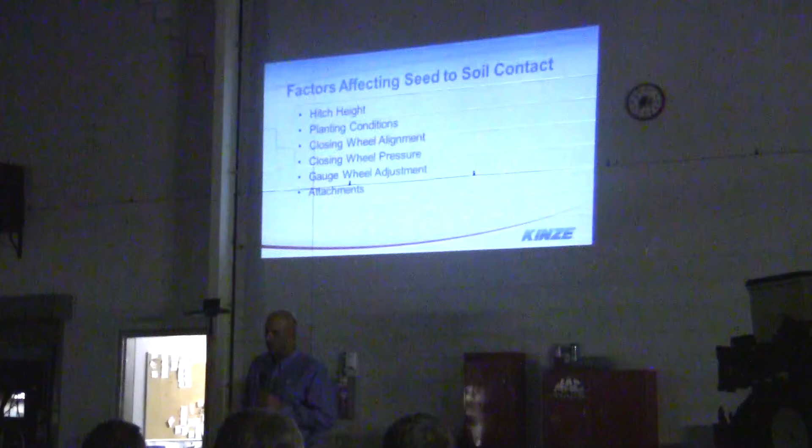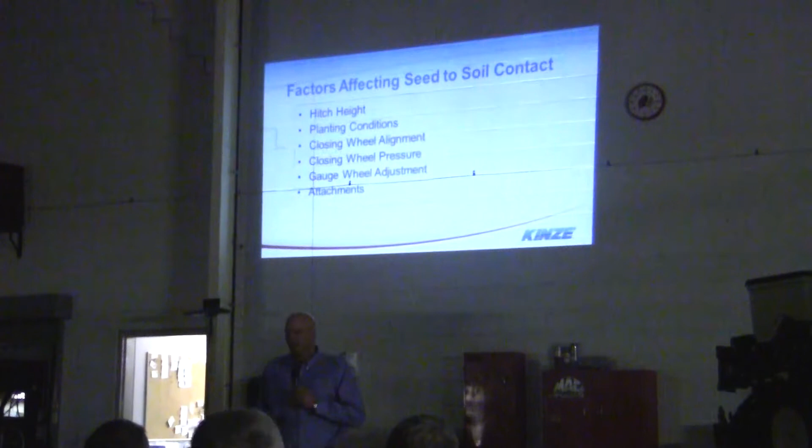Factors affecting seed to soil contact include hitch height, planting conditions, whether it's too dry or too wet, closing wheel pressure, closing wheel alignment, and gauge wheel adjustments and attachments.

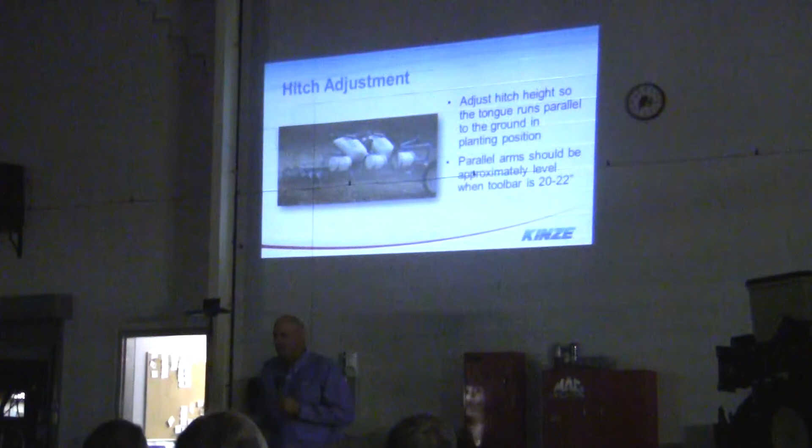We talked a lot about hitch adjustment, and the hitch height should be parallel with the tongue and the ground when planting in the planting position. Parallel arms should be about 22 inches from the ground to the hitch.

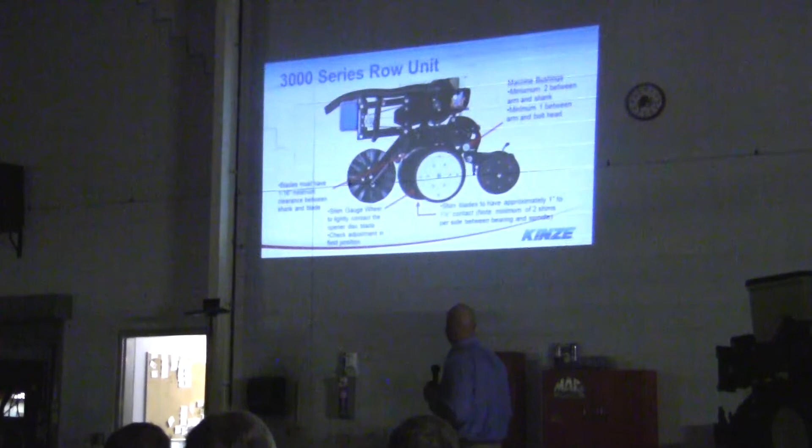This is a 3000 series tool or row unit, and you can see some of the things. Blades must have a 1/16 inch minimum clearance between the shank and the blade. The shim gauge wheel should lightly contact the opener, and that should be adjusted in the field position. Shim blade should have 1 to 1.5 inches of contact, and the machine bushings, a minimum of 2 between the arm and shank, and a minimum of 1 between the arm and bolt head.

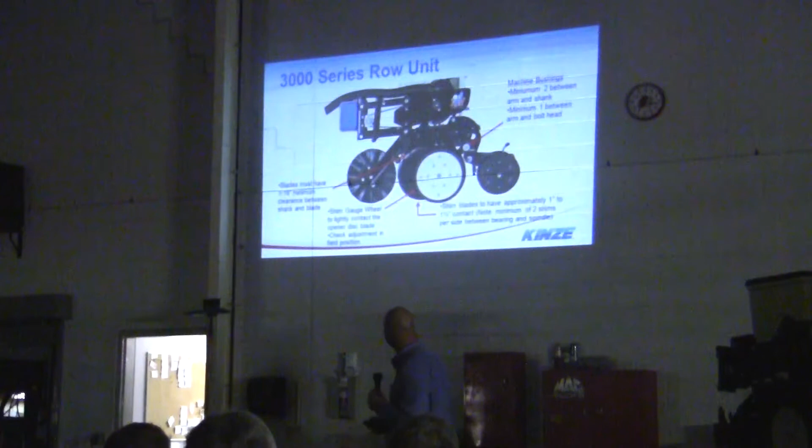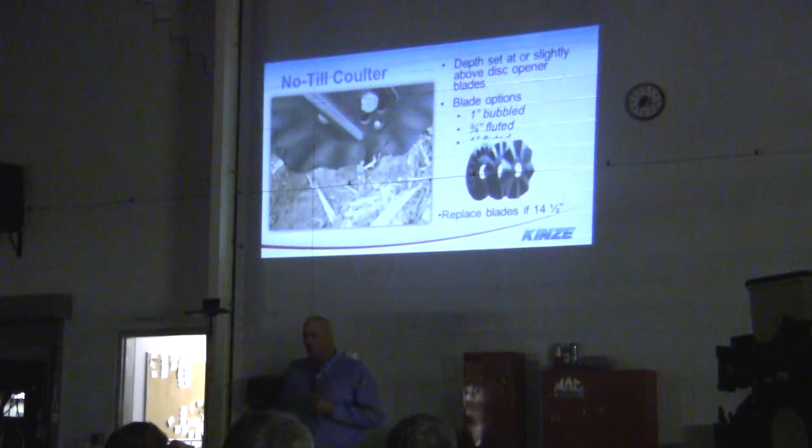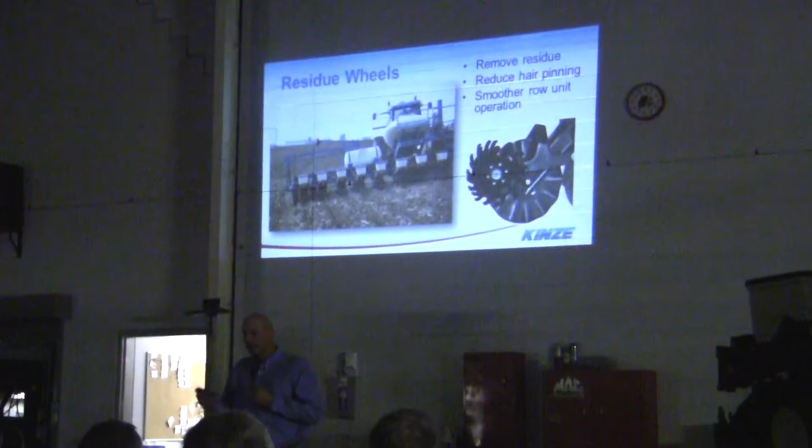Residue wheels, this is another thing that's different wherever you go. We feel very confident with our residue wheels. They're floating wheels. A lot of guys will put gauge wheels on them, but we feel it's not necessary because they're floating wheels. They float with the depth and the setting out in the field. The purpose of this is to remove residue, reduce hair pinning, and provide a smoother row unit operation.

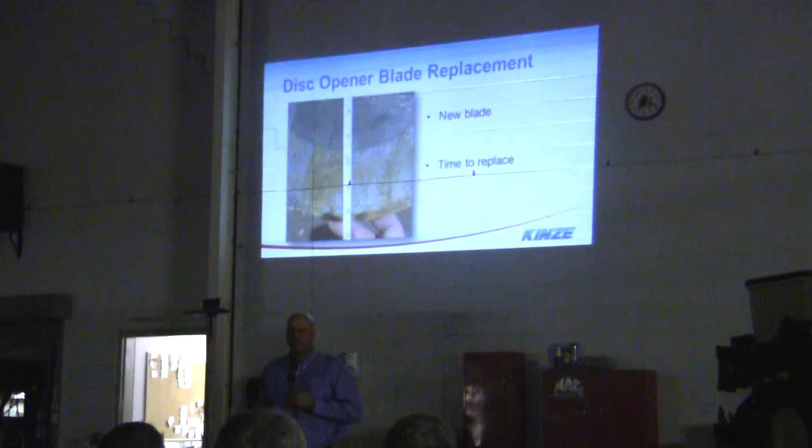Disc opener blades. Does anybody know how big a disc blade is when it's new? 15 inches. Time to replace when it's 14.5 inches in diameter.

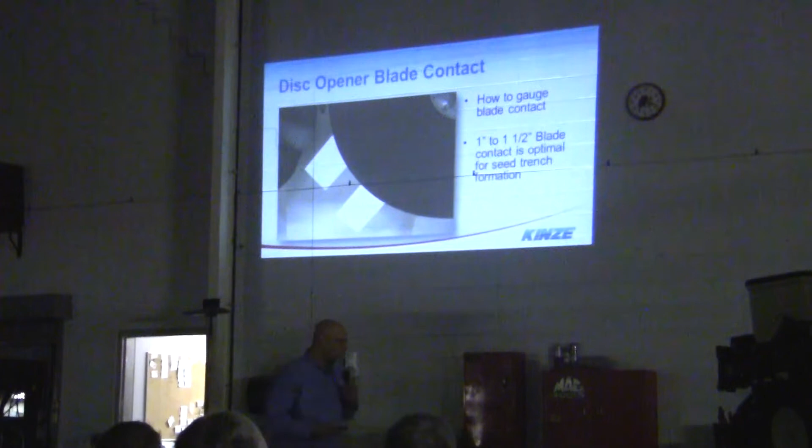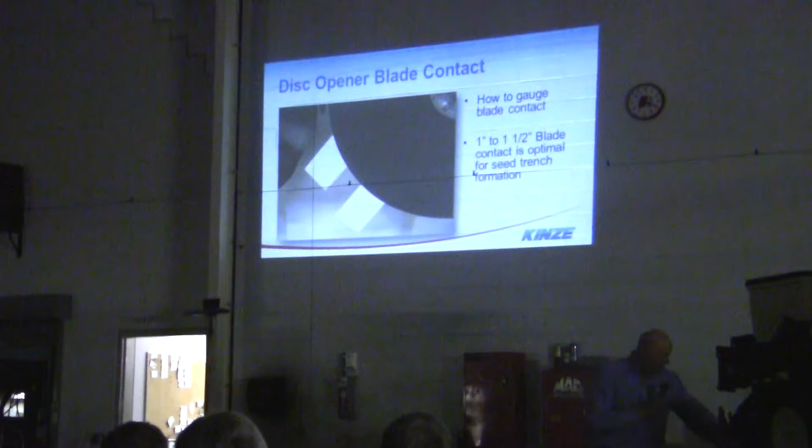Disc opener blade contact, and this is very scientific, so it took a long time for us to figure out how to do this, but this is how we gauge the right distance. If you have 2 salesman's business cards that wear you out and you want to get rid of them, you put one up top, up in here, and you push it down so you have very good pressure. Then you take one on the bottom and push it up, and there should be 1 to 1.5 inch spacing. Pretty simple.

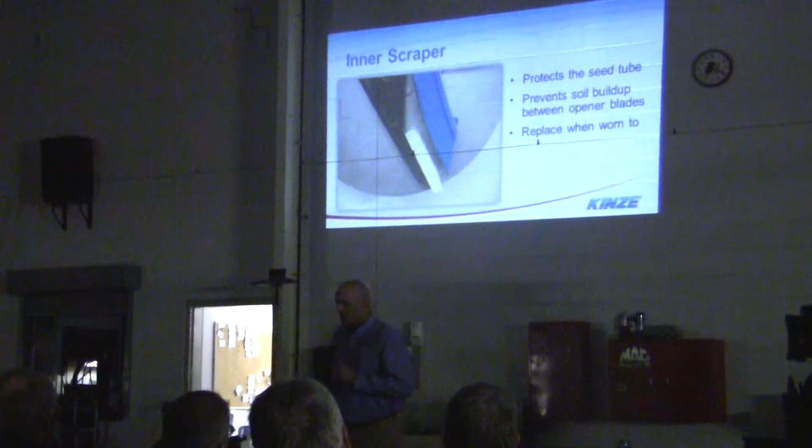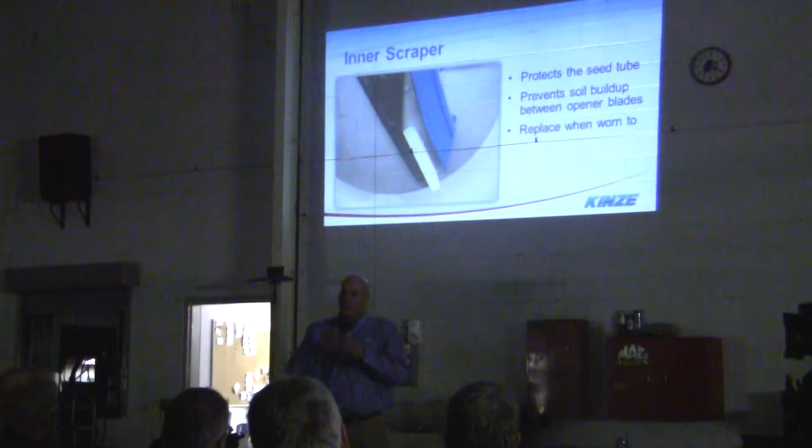Inner scraper. This is critical for your seed. This protects the seed tube. A lot of times as they're worn down, you'll see the bottom of your seed tube getting scraped and worn out. I've seen some seed tubes where half the seed tube bottom is ripped off. It's worn through.

Prevents soil buildup between the opener blades, and make sure you replace it when it's 5/8 inch or less.

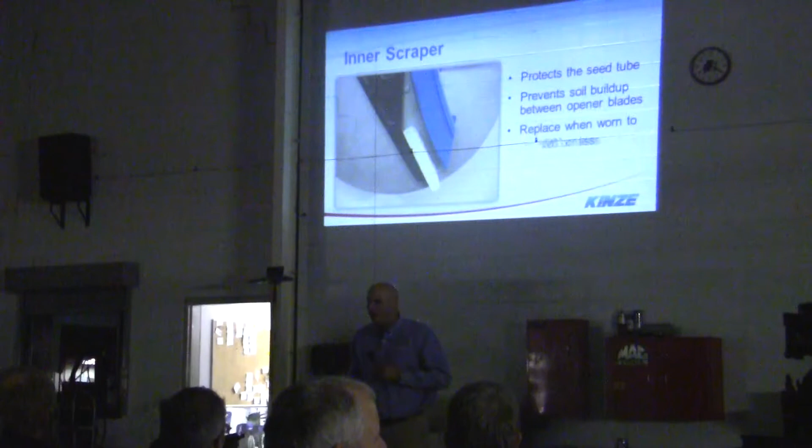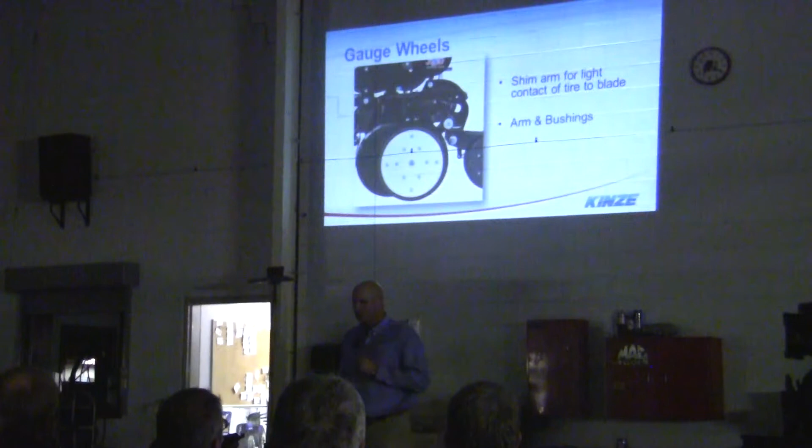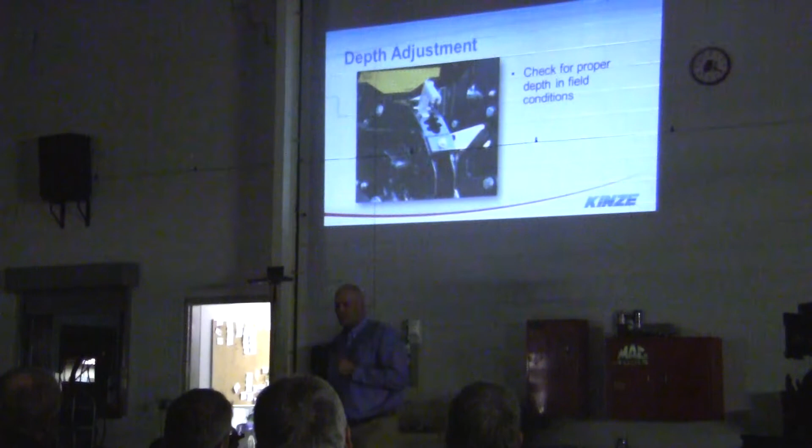Gauge wheels. Shim arm for light contact of the tire to the blade, and also arm and bushing. Depth adjustment is also another field-based setting depending on where you're at and how it's going into the ground. Check for proper depth in the field conditions. There are multiple settings on our planters, which gives you flexibility.

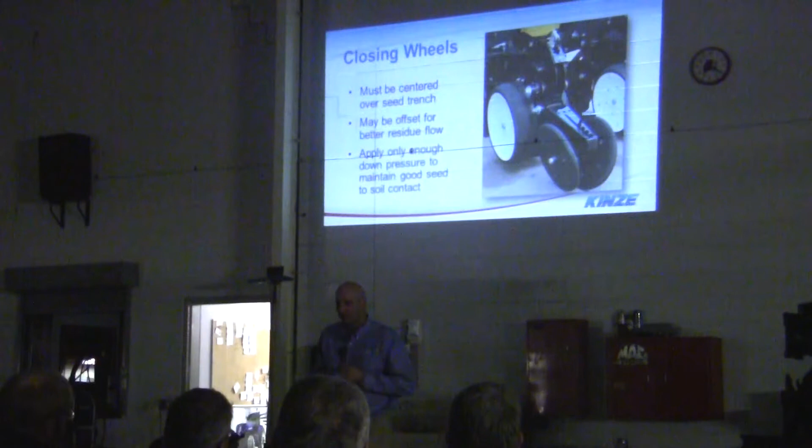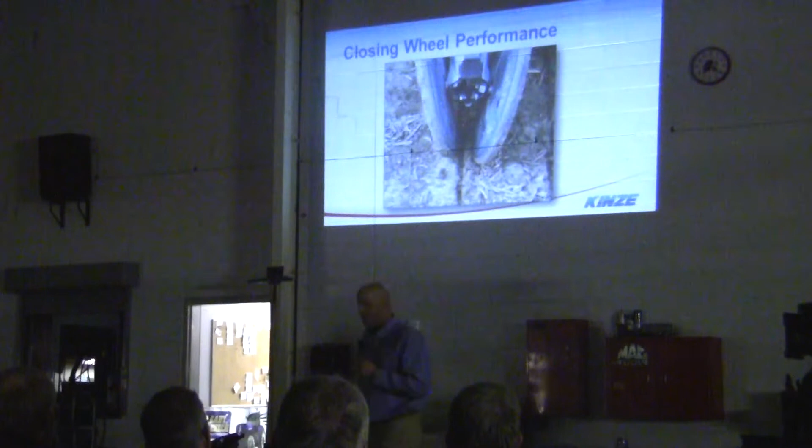Here you can see where on the left side, it's over the hole, it's over the trench, and that's not what it's there for. Where we're starting to get into higher areas of residue now with what you guys are doing with tillage practices, Kinze does offer a stalk deflector that goes in between the rubber bead press wheels or whatever press wheel options you're putting in there. Just mounts right up in there, and it's real nice to put on. You see there where stalks are starting to lodge and gather up in there? That'll prevent that. Like that?

Did you see my slideshow before? No, I didn't, Dave. All right.

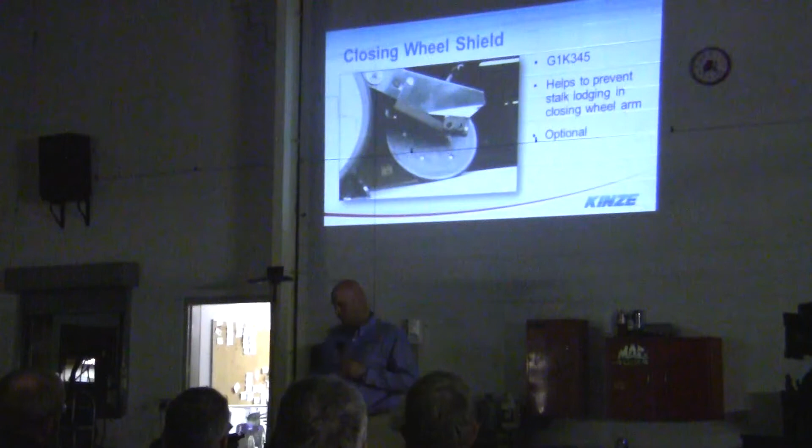Here's what he's talking about right here. The top number is a part number, but it helps prevent stalk lodging in the closing wheel. That's perfect. Yep. We do offer those. A lot of guys use it. It stops it from jamming, like we saw on the slide before. See how the stalks slide up in there? What that does is it just plows. Very good.

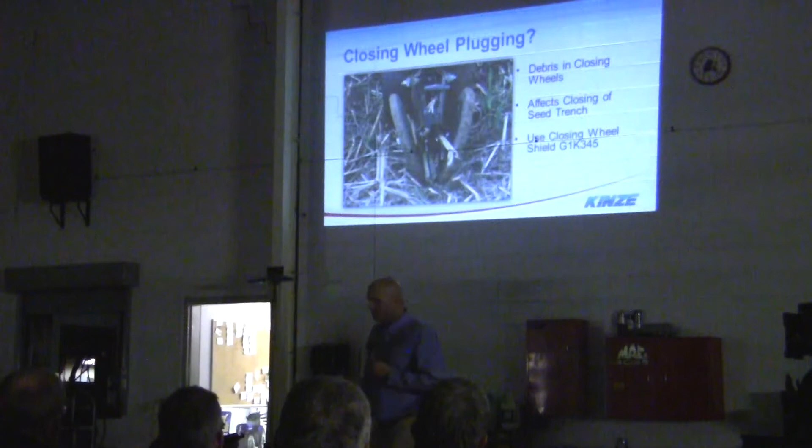Parallel arms. Let's make sure the bolts are firm and tight, bushings are not worn out or loose, the down pressure springs are still holding their pressure, and the drive chains. Some of the guys ask, hey, is my planter worn out? You go up to their planter and just grab and rack it from side to side. That's not good. What will happen is your planter will be all out of whack. Your rows will be offset. Not good. We do offer in the sands and the clays a heavy-duty spring on your right-hand side for more down pressure.

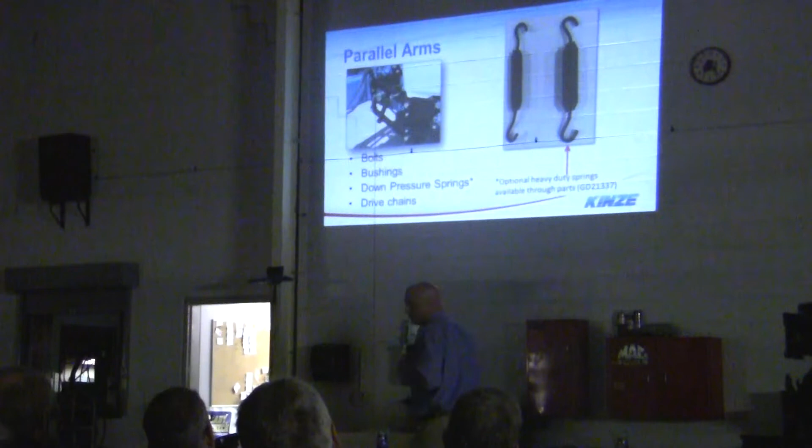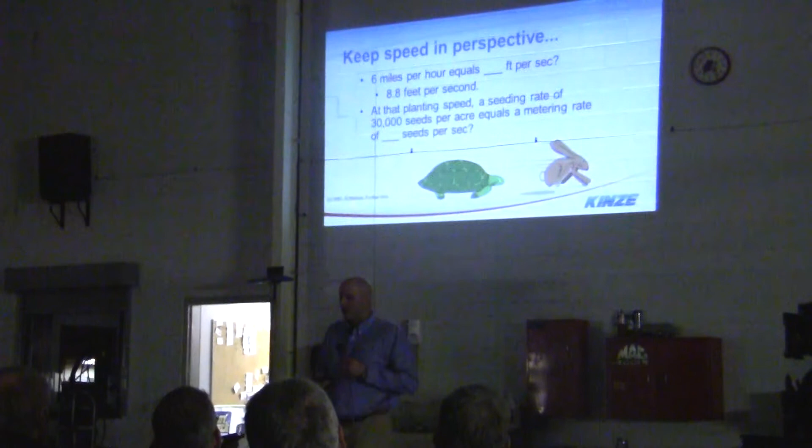Keep the speed in perspective. I get a lot of questions when we're out at shows and dealerships. What's the right speed? 6 miles per hour equals how many feet per second? It's 8.8 feet per second. At that planting speed, a seeding rate of 30,000 seeds per acre equals a metering rate of 15.2 seeds per second.

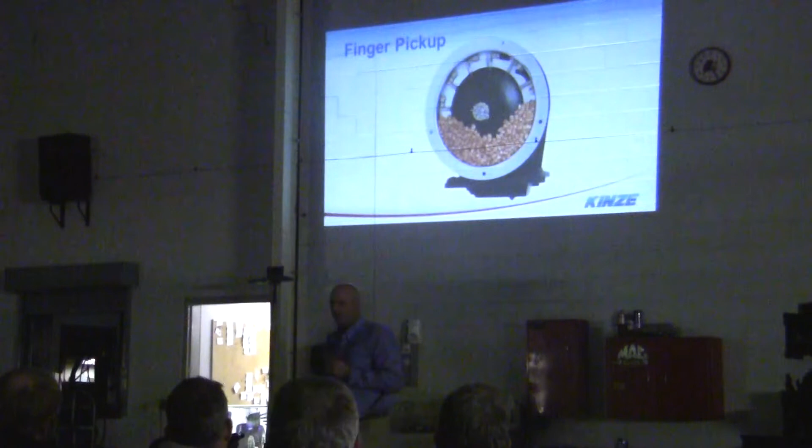Meter inspection, which is critical when we're getting ready to plant, and when we're done. Up here you can see I brought a few of the different meters and some of the different cells you can put in them. I'm kind of going back, but in the packet we put together, they're talking about soybeans being bigger than normal, so going down to 48 cell instead of 60. So it's very important that you get those right away. Finger pickup. I would say 85 to 90% of the people who have planters in this room have finger pickup. Also brush meter for your soybeans.

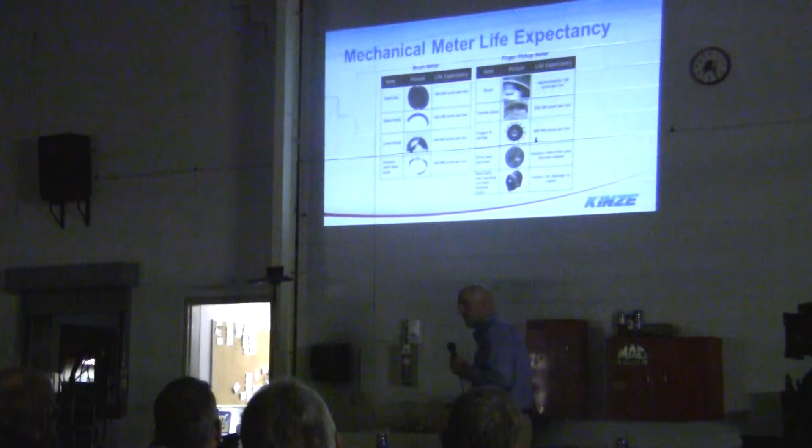Mechanical meter life expectancy. As you can see on the left-hand side, it's your brush meter. The seed disc is 100 to 200 acres per row. The upper brush, which is getting the majority of the wear and tear, is 120 to 400 acres. Your lower brush is 240 to 800. And your stainless steel wear band is about 240 to 800.

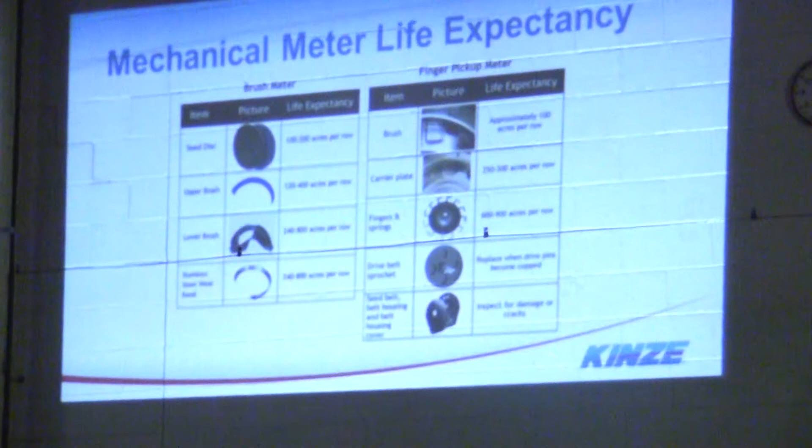On your finger pickup, your top brush is at 100 acres per row. Your carrier plate, which you'll see a little scarring or a little different tint, is at 250 to 300. Your fingers and springs are 600 to 900 acres per row. The way you tell that is if you flip your finger back and it doesn't spring back, it's time to get rid of it. Your drive belt sprocket, replace when the pins become cupped. And your seed belt, inspect for damage. These are very low maintenance meters, extremely dependable, and that's why they're the majority of what we sell.